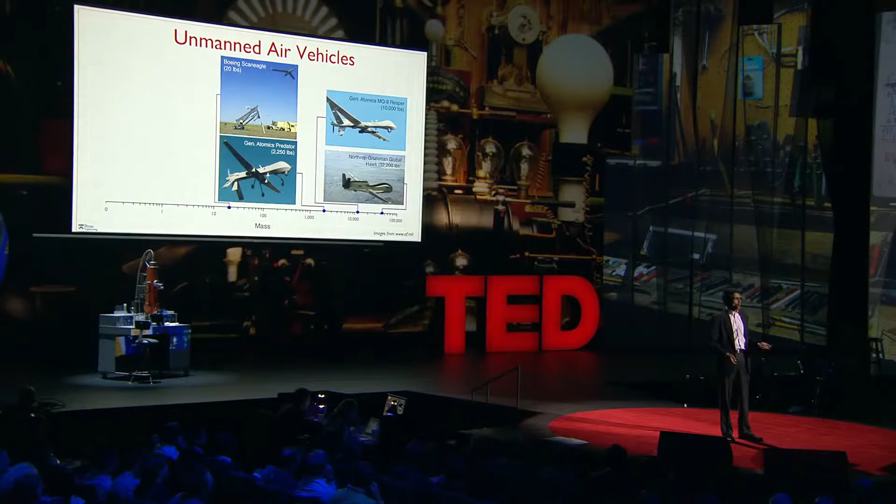What we're interested in is developing robots like this, and here are two other pictures of robots that you can buy off the shelf. So these are helicopters with 4 rotors, and they're roughly a meter or so in scale and weigh several pounds. And so we retrofit these with sensors and processors, and these robots can fly indoors without GPS.

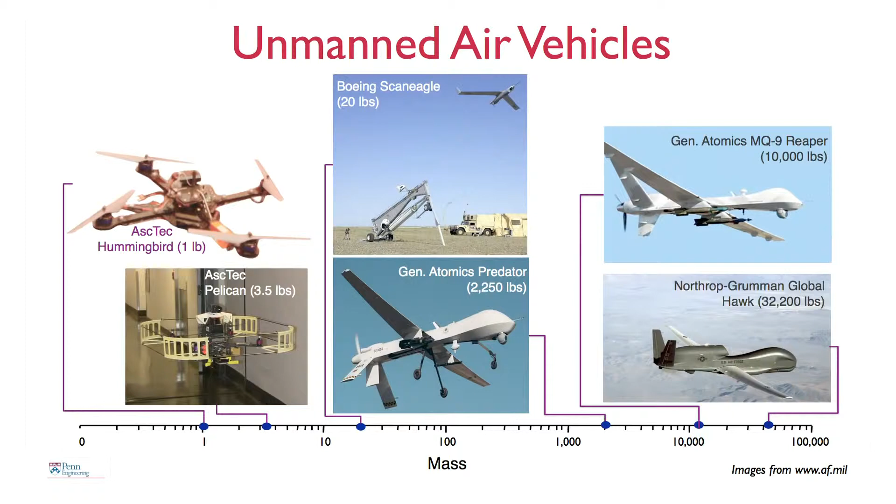The robot I'm holding in my hand is this one, and it's been created by 2 students, Alex and Daniel. So this weighs a little more than 1/10 of a pound. It consumes about 15 watts of power, and as you can see, it's about 8 inches in diameter.

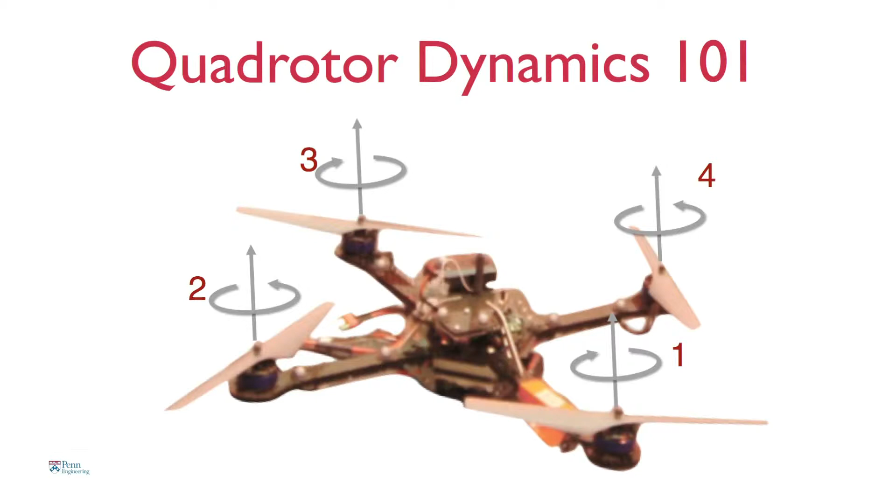So let me give you just a very quick tutorial on how these robots work. So it has 4 rotors. If you spin these rotors at the same speed, the robot hovers. If you increase the speed of each of these rotors, then the robot flies up, it accelerates up. Of course, if the robot were tilted, inclined to the horizontal, then it would accelerate in this direction. So to get it to tilt, there's one of 2 ways of doing it.

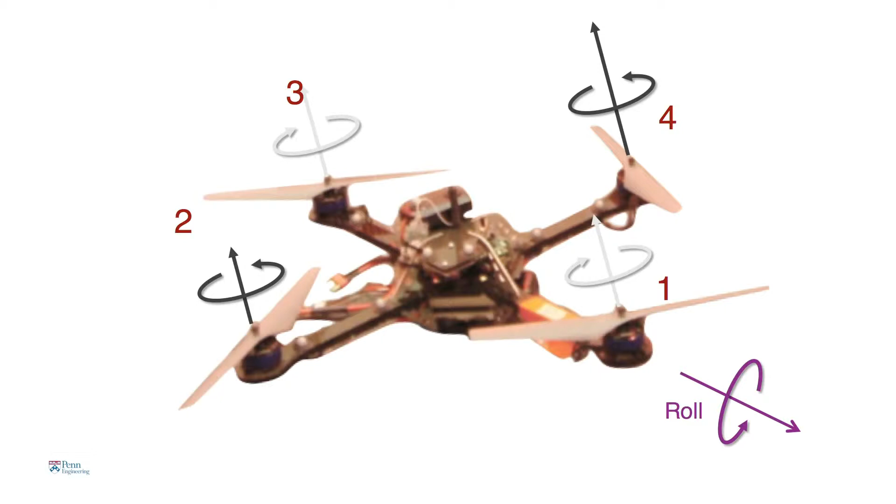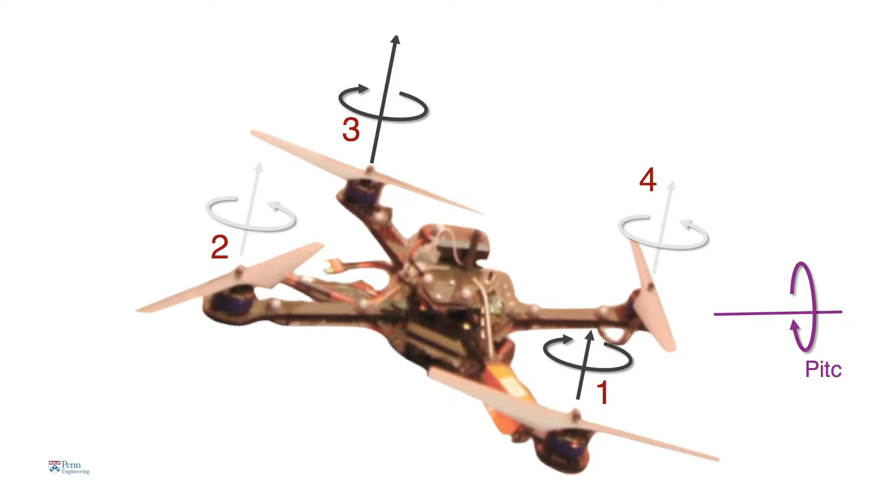So in this picture, you see that rotor 4 is spinning faster, and rotor 2 is spinning slower. And when that happens, there's a moment that causes this robot to roll. And the other way around, if you increase the speed of rotor 3 and decrease the speed of rotor 1, then the robot pitches forward. And then finally, if you spin opposite pairs of rotors faster than the other pair, then the robot yaws about the vertical axis.

So an onboard processor essentially looks at what motions need to be executed and combines these motions and figures out what commands to send to the motors 600 times a second. And that's basically how this thing operates.

So one of the advantages of this design is when you scale things down, the robot naturally becomes agile. So here, R is the characteristic length of the robot. It's actually half the diameter. And there are lots of physical parameters that change as you reduce R. The one that's the most important is the inertia, or the resistance to motion. So it turns out the inertia, which governs angular motion, scales as a 5th power of R.

So the smaller you make R, the more dramatically the inertia reduces. As a result, the angular acceleration, denoted by the Greek letter alpha here, goes as 1/R. It's inversely proportional to R. The smaller you make it, the more quickly you can turn.

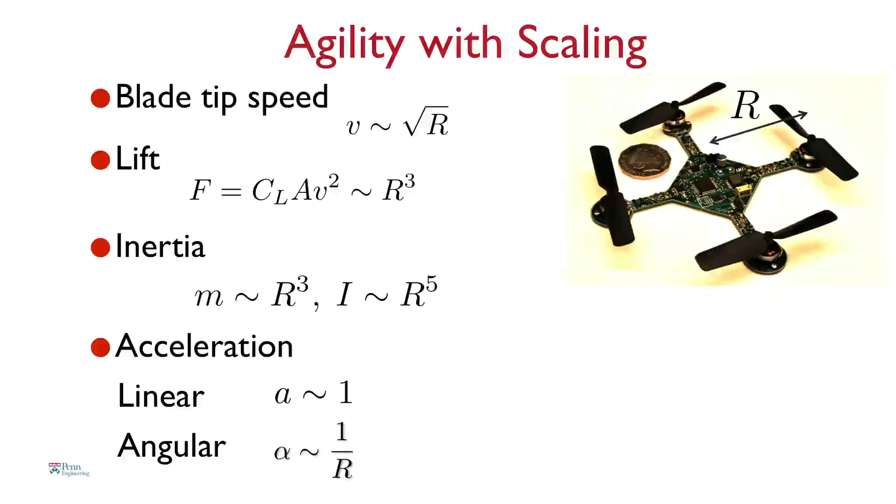So this should be clear in these videos. On the bottom right, you see a robot performing a 360-degree flip in less than half a second. Multiple flips take a little more time.

Here, the processors on board are getting feedback from accelerometers and gyros on board and calculating, like I said before, commands at 600 times a second to stabilize this robot. So on the left, you see Daniel throwing this robot up into the air, and it shows you how robust the control is. No matter how you throw it, the robot recovers and comes back to him.

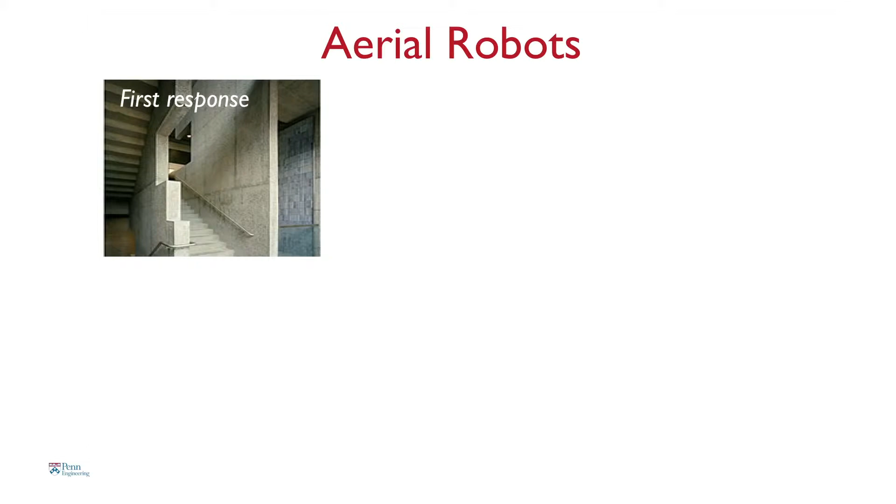So why build robots like this? Well, robots like this have many applications. You can send them inside buildings like this as first responders to look for intruders, maybe look for biochemical leaks, gaseous leaks. You can also use them for applications like construction.

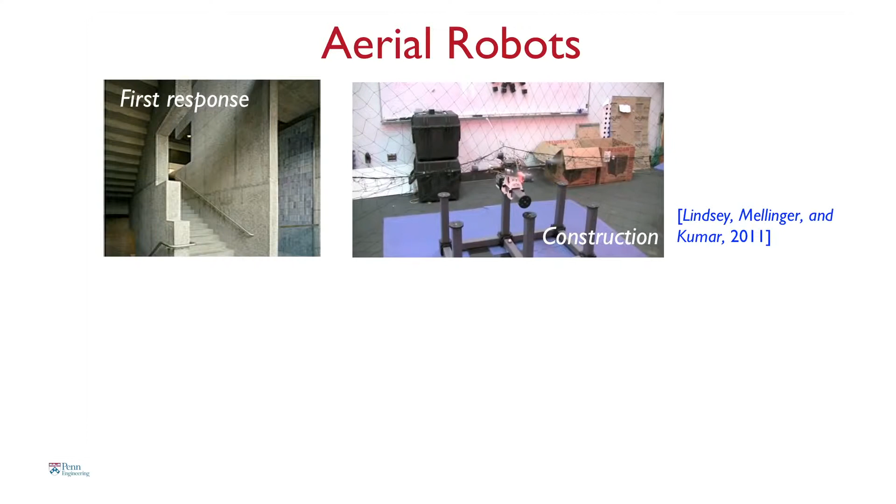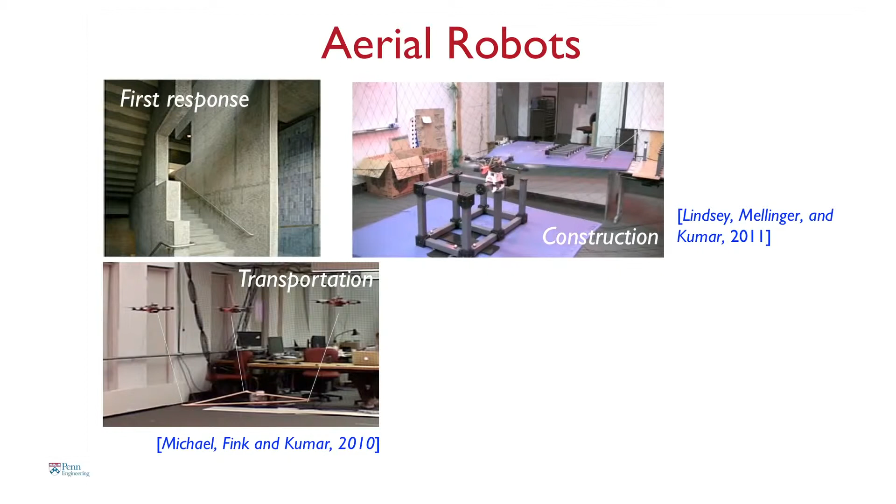So here our robots are carrying beams, columns, and assembling cube-like structures. I'll tell you a little bit more about this. The robots can be used for transporting cargo. So one of the problems with these small robots is their payload carrying capacity. So you might want to have multiple robots carry payloads.

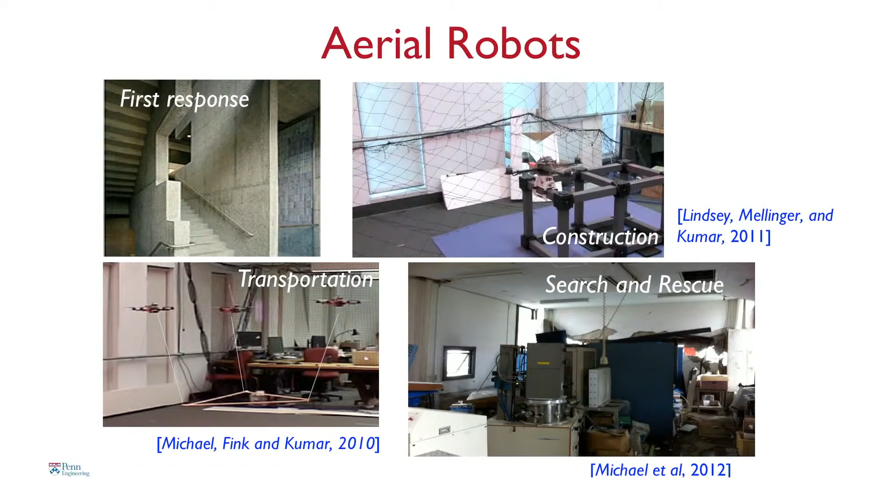This is a picture of a recent experiment we did, actually not so recent anymore, in Sendai, shortly after the earthquake. So robots like this could be sent into collapsed buildings to assess the damage after natural disasters, or sent into reactor buildings to map radiation levels.

So one fundamental problem that the robots have to solve if they are to be autonomous is essentially to figure out how to get from point A to point B. This gets a little challenging because the dynamics of this robot are quite complicated. In fact, they live in a 12-dimensional space.

So we use a little trick. We take this curved 12-dimensional space and transform it into a flat 4-dimensional space, consisting of x, y, z, and the yaw angle. What the robot does is plan what we call a minimum snap trajectory. To remind you of physics, you have position, derivative velocity, then acceleration, then jerk, and then snap. This robot minimizes snap.

What that effectively does is produce a smooth and graceful motion, avoiding obstacles. These minimum snap trajectories in this flat space are then transformed back into the complicated 12-dimensional space, which the robot must do for control and execution.

So let me show you some examples of what these minimum snap trajectories look like. In the first video, you will see the robot going from point A to point B through an intermediate point.

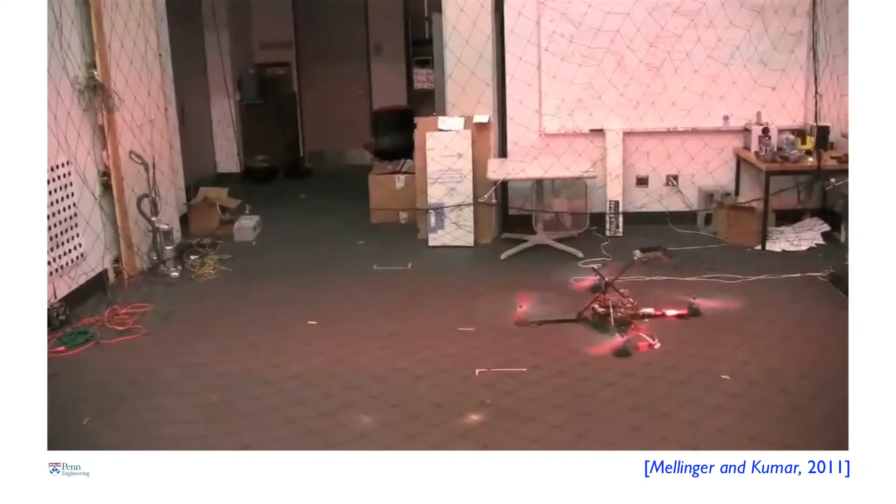So the robot is obviously capable of executing any curved trajectory. These are circular trajectories where the robot pulls about 2 Gs.

Here you have overhead motion capture cameras on top that tell the robot where it is 100 times a second. It also tells the robot where these obstacles are.

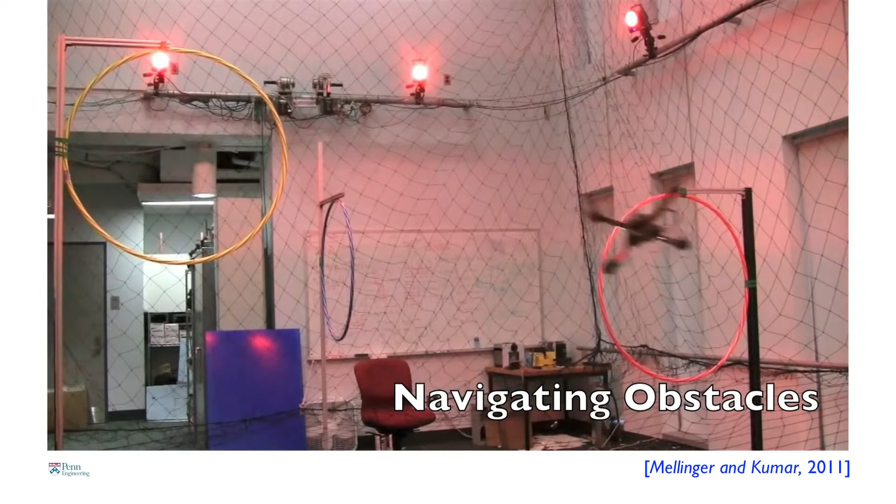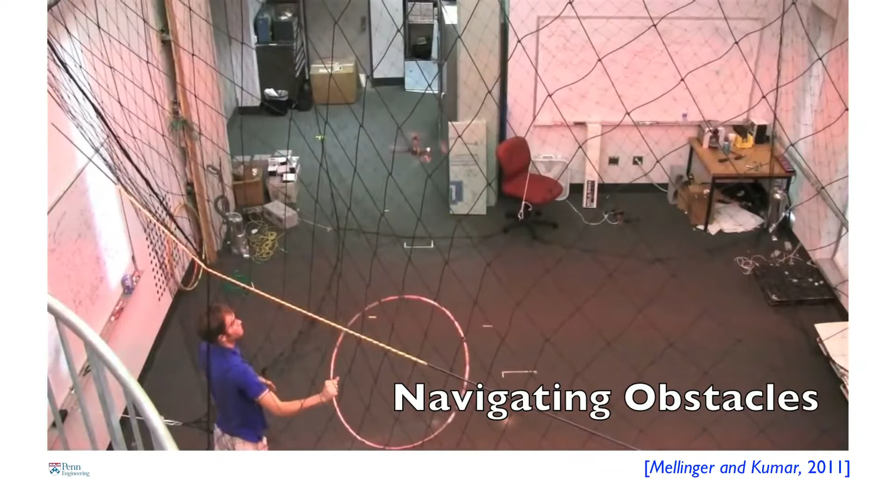And the obstacles can be moving—here you'll see Daniel throw this hoop into the air. The robot is calculating the position of the hoop and trying to figure out how to best go through it. As an academic, we're always trained to jump through hoops to raise funding for our labs, and we get our robots to do that.

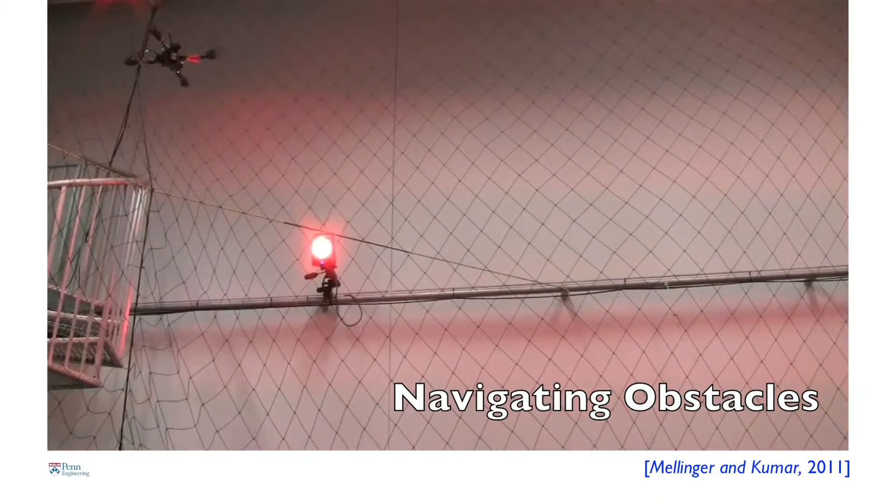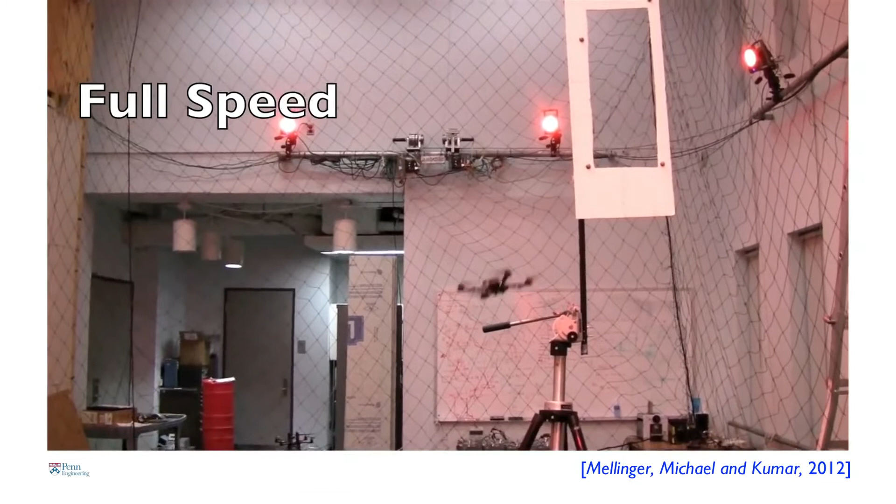So another thing the robot can do is remember pieces of trajectory that it learns or is pre-programmed. Here you see the robot combining a motion that builds up momentum, then changes its orientation, and then recovers. It has to do this because the gap in the window is only slightly larger than the width of the robot.

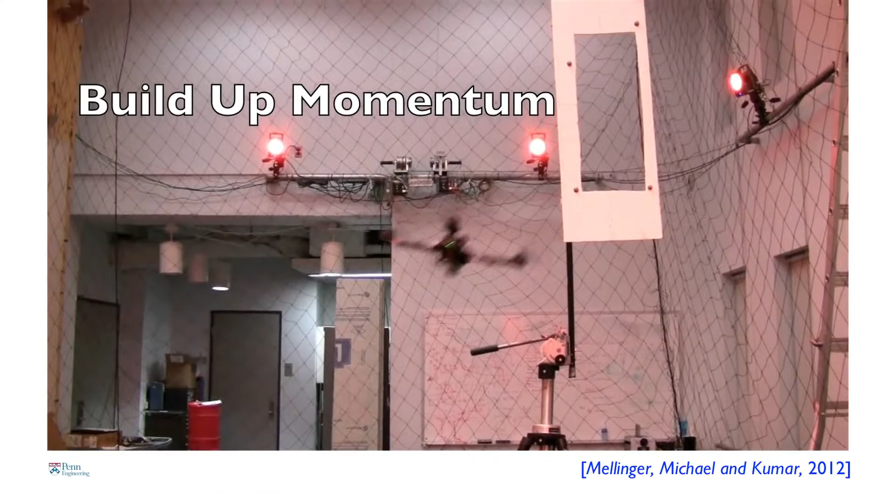Just like a diver stands on a springboard and jumps off to gain momentum, then does a pirouette, a 2.5 somersault, and gracefully recovers, this robot is basically doing that. It knows how to combine little bits and pieces of trajectories to do these fairly difficult tasks.

So I want to change gears. One of the disadvantages of these small robots is its size, and I told you earlier that we may want to employ lots and lots of robots to overcome the limitations of size. So one difficulty is how do you coordinate lots of these robots?

And so here we look to nature. I want to show you a clip of Aphaenogaster desert ants in Professor Stephen Pratt's lab carrying an object—this is actually a piece of fig. You take any object coated with fig juice, and the ants will carry it back to the nest.

So these ants don't have any central coordinator. They sense their neighbors—there's no explicit communication. But because they sense the neighbors and because they sense the object, they have implicit coordination across the group. This is the kind of coordination we want our robots to have.

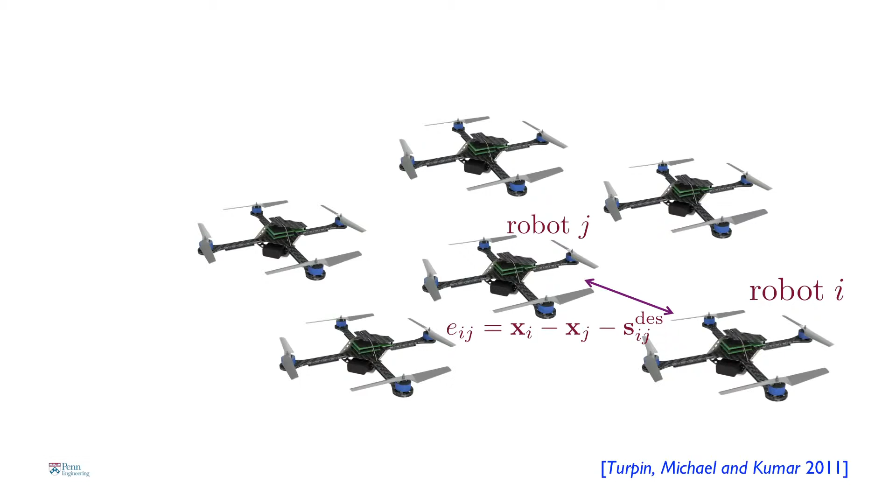So when we have a robot surrounded by neighbors—let's look at robot I and robot J—what we want the robots to do is monitor the separation between them as they fly in formation, and make sure this separation is within acceptable levels. The robots monitor this error and calculate control commands 100 times a second, which then translates into motor commands 600 times a second.

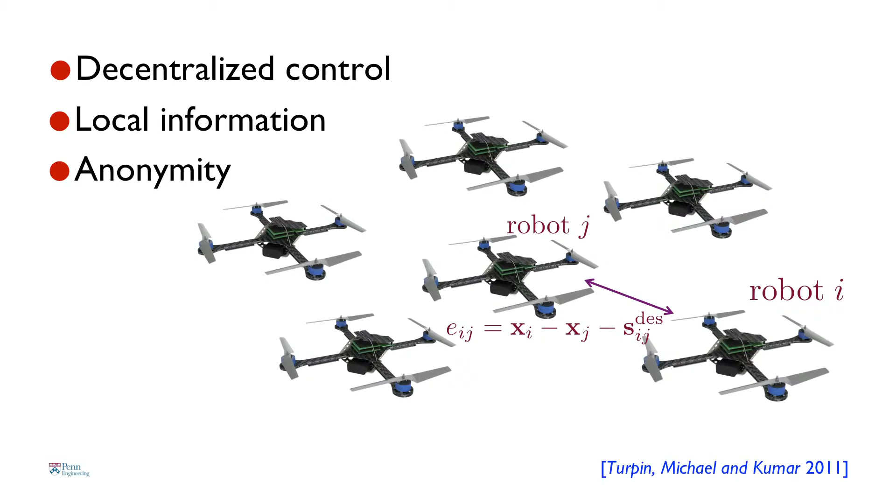This also has to be done in a decentralized way. If you have lots and lots of robots, it's impossible to coordinate all this information centrally fast enough for the robots to accomplish the task. Plus, the robots have to base their actions only on local information—what they sense from their neighbors. And finally, we insist that the robots be agnostic to who their neighbors are. This is what we call anonymity.

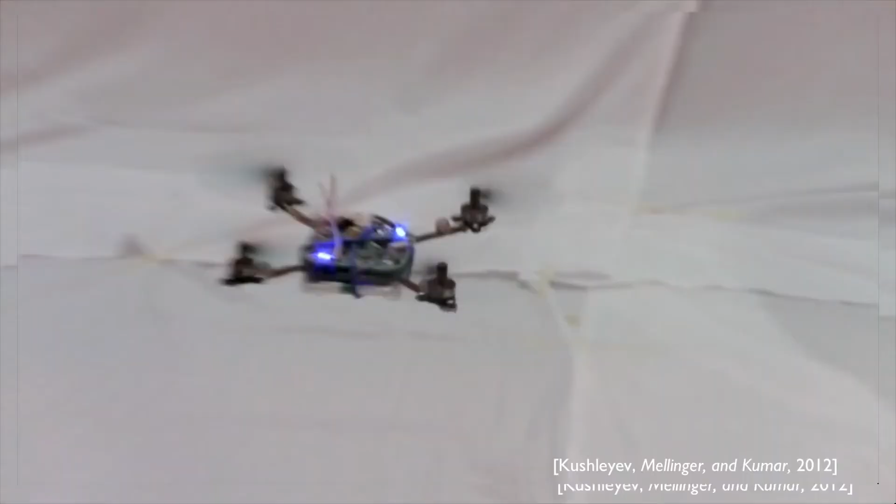So what I want to show you next is a video of 20 of these little robots flying in formation.

They're monitoring their neighbor's position and maintaining formation. The formations can change - they can be planar or three-dimensional. As you can see here, they collapse from a three-dimensional formation into a planar formation.

And to fly through obstacles, they can adapt the formations on the fly. These robots come really close together, as you can see in this figure 8 flight - they come within inches of each other. And despite the aerodynamic interactions with these propeller blades, they're able to maintain stable flight.

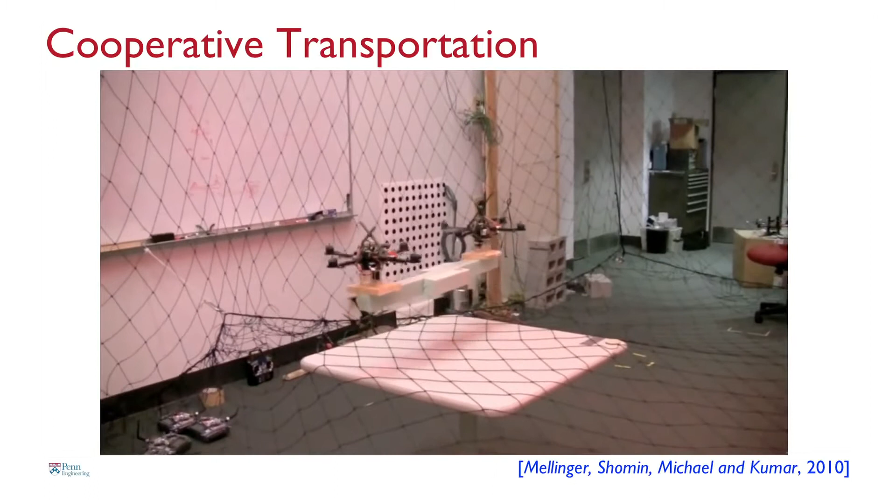Once you know how to fly in formation, you can actually pick up objects cooperatively. This just shows that we can double, triple, quadruple the robot strength by getting them to team with neighbors, as you can see here. One disadvantage is that as you scale things up, if you have lots of robots carrying the same thing, you're essentially increasing the inertia, and therefore you pay a price - they're not as agile. But you do gain in terms of payload carrying capacity.

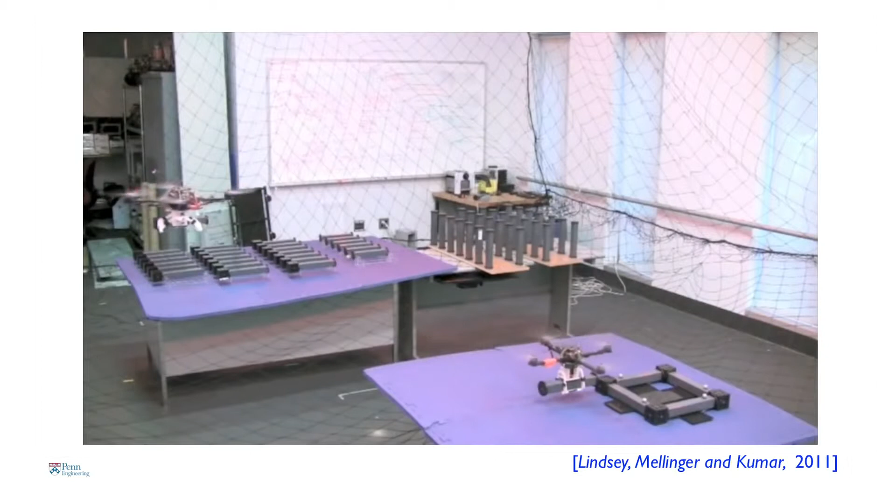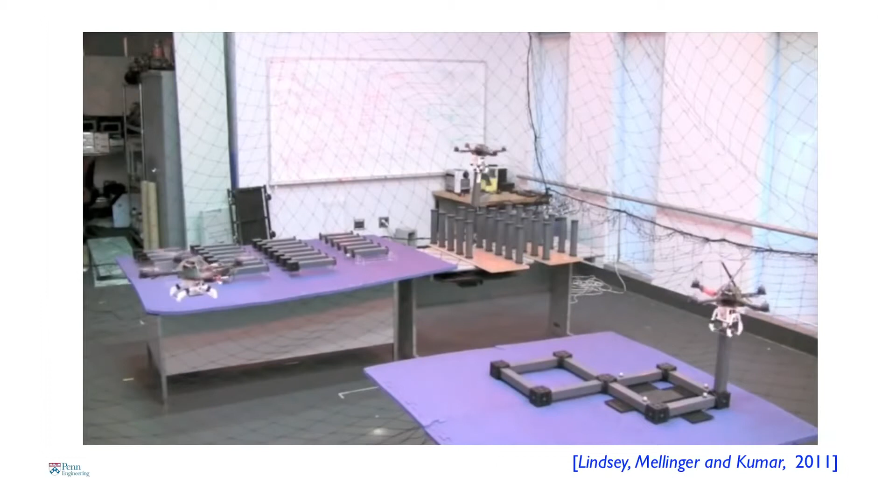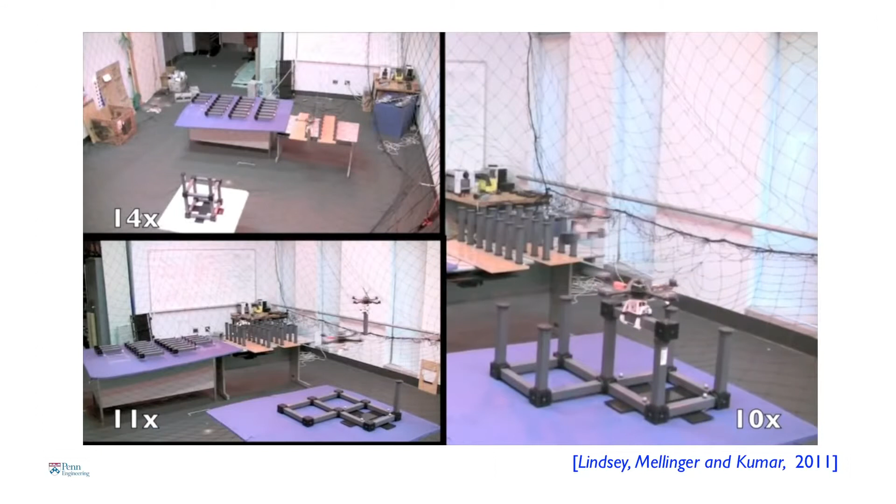Another application I want to show you, again this is in our lab - work done by Quentin Lindsey, a graduate student. His algorithm essentially tells these robots how to autonomously build cubic structures from truss-like elements, telling the robot what part to pick up, when, and where to place it. In this video, sped up 10 to 14 times, you see 3 different structures being built by these robots. Everything is autonomous, and all Quentin has to do is give them a blueprint of the design he wants to build.

So all these experiments and demonstrations have been done with the help of motion capture systems. So what happens when you leave your lab and go outside into the real world? And what if there's no GPS?

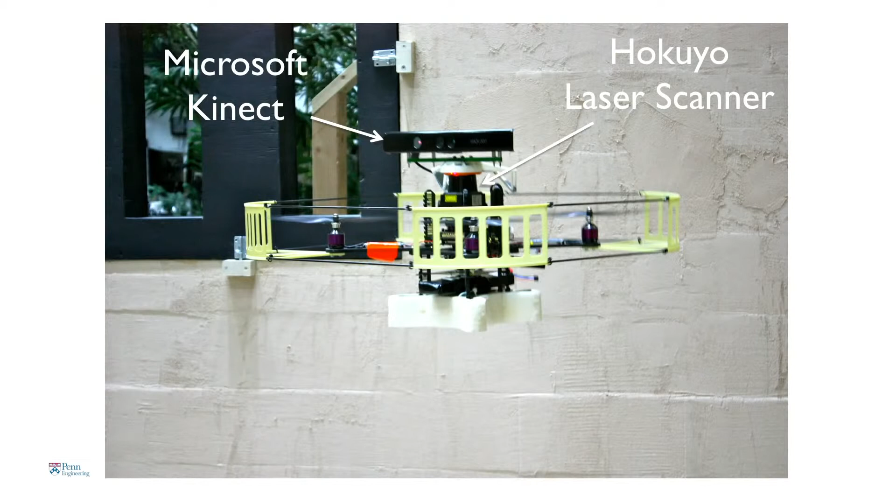This robot is equipped with a camera and a laser rangefinder, or laser scanner, and it uses these sensors to build a map of the environment. That map consists of features like doorways, windows, people, and furniture, and it figures out its position with respect to those features. So there is no global coordinate system - the coordinate system is defined based on the robot, where it is and what it's looking at, and it navigates with respect to those features.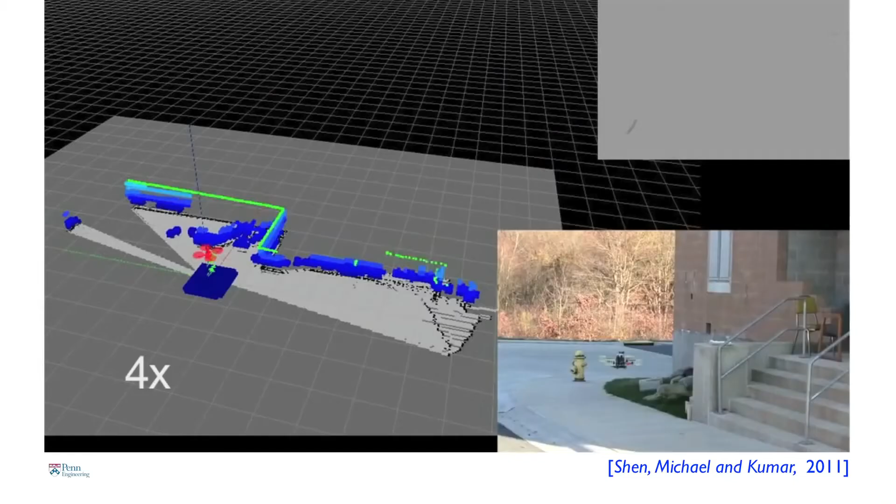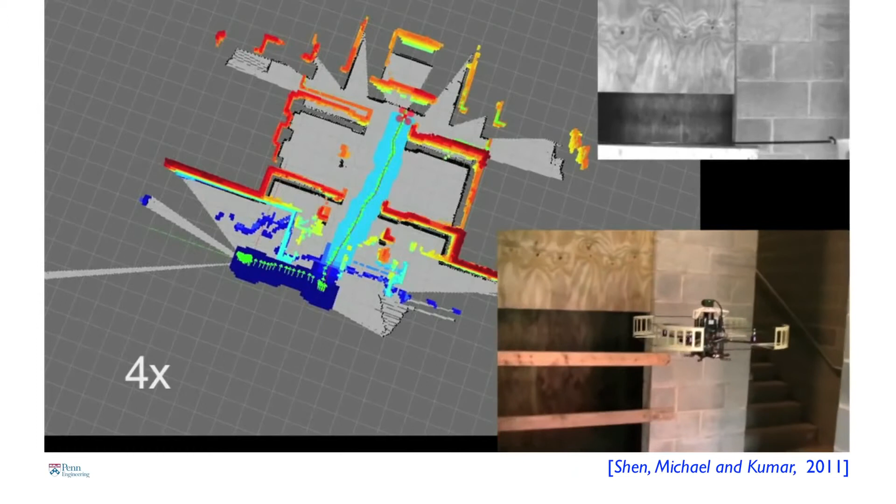I want to show you a clip of algorithms developed by Frank Shen and Professor Nathan Michael that shows this robot entering a building for the very first time and creating this map on the fly. The robot figures out what the features are, builds the map, figures out where it is with respect to the features, and then estimates this position 100 times a second, allowing us to use the control algorithms I described earlier.

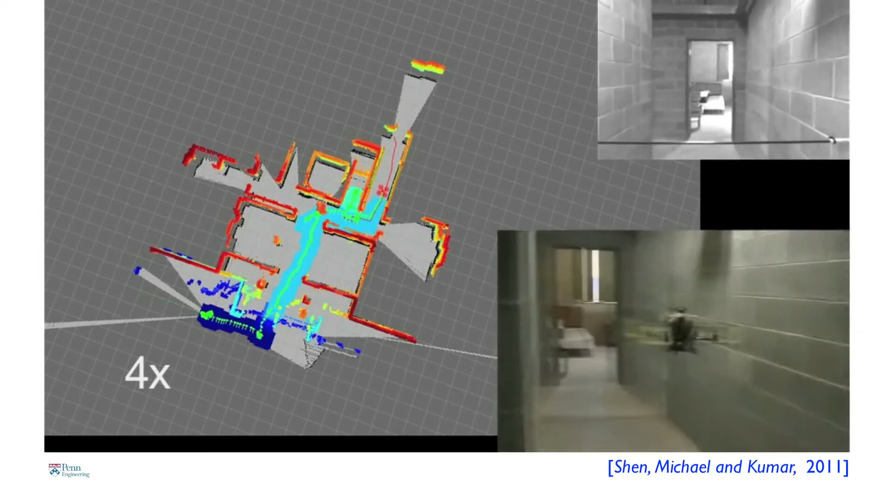This robot is actually being commanded remotely by Frank, but the robot can also figure out where to go on its own. So suppose I were to send this into a building and had no idea what it looked like - I can ask this robot to go in, create a map, and then come back and tell me what the building looks like.

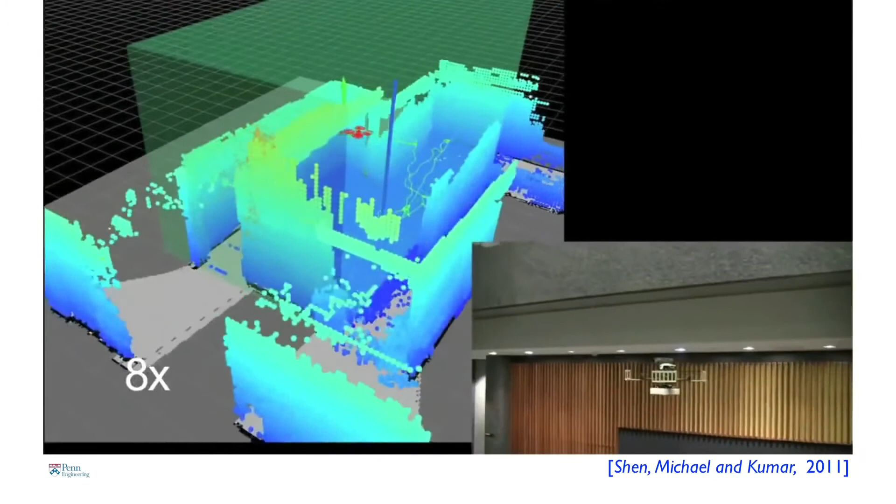Here, the robot is not only solving the problem of how to go from point A to point B in this map, but it's figuring out what the best point B is at every time. Essentially, it knows where to go to look for places that have the least information, and that's how it populates this map.

So I want to leave you with one last application, and there are many applications of this technology. I'm a professor, and we're passionate about education - robots like this can really change the way we do K through 12 education. But we're in Southern California, close to Los Angeles, so I have to conclude with something focused on entertainment.

I want to conclude with a music video. I want to introduce the creators, Alex and Daniel, who created this video. Before I play this video, I want to tell you that they created it in the last 3 days after getting a call from Chris. The robots that play the video are completely autonomous - you will see 9 robots play 6 different instruments. And of course, it's made exclusively for TED 2012. Let's watch.